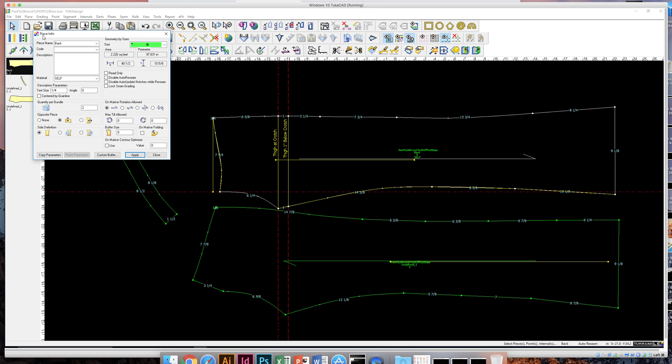Okay, I'm going to double click that. Oh, when I double clicked, it pulled up the whole pattern piece, not my line. So if that happens, maybe we zoom in and try to get closer.

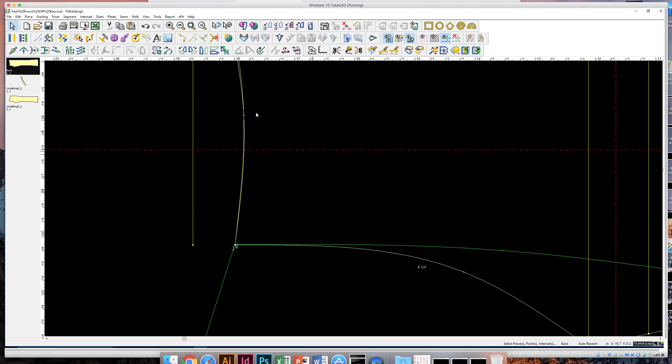Let's see if this will work. Okay, it's a little bit off here. I should actually move that anyway while I'm here. Oops, use my zoom tool. What we'll probably have to do is add a point on an internal line because I skipped that anchor point, and that's why it's off.

So I'm going to do that real quick, add a point right here. It's curve, say OK. And then now go ahead and move it with the move tool. Oh dear, I don't think it worked. There it goes, click and say OK. Great, now it's exactly on my piece.

But again, that doesn't solve my first problem. Oh, actually when I clicked it this time it did go to the internal line, so I lucked out. But if I was still having trouble not selecting my piece, what I do sometimes is move my contour line just for a second, just one point on it, so they're not completely overlapping. That makes it easier to grab it just to name it, and then I put the point back on top of the piece. Let me know if you guys are having that issue.

Okay, so I'm going to call this natural waist. I don't believe I have that measurement called out yet. I do want it for both pieces because I want it to wrap all the way around the body. So say OK.

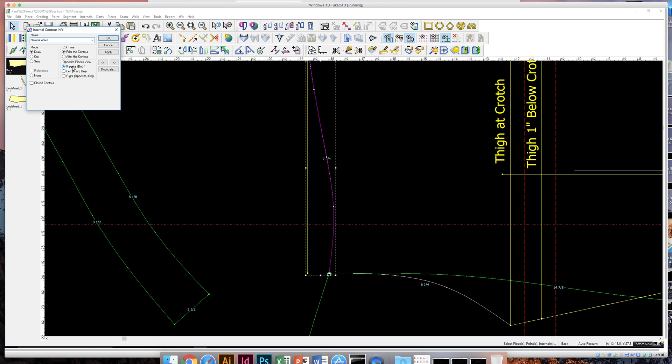Let's see if I can move this. Okay, so now I need to add to natural waist and include the back. Maybe I can zoom in a bit for the back. I will hit D for my draft tool, and I will click the first point.

Okay, yes. Hold shift and click that next point. Hold shift and click the next point. And then I believe that's a shift.

Oh, we might need to clean up this pattern piece a little bit. And then click the last one. That's not looking good, I'm going to say cancel. Let's try that again, I feel like we should probably get rid of one of these points. This pattern needs to be cleaned up a little bit. There we go, okay, let's try that again.

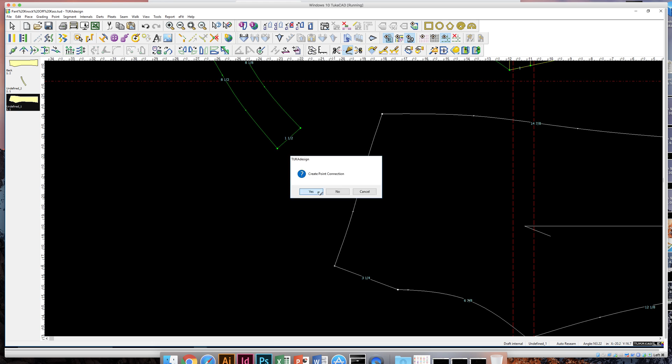So click the first point with our draft tool, hold shift and get the next one. Again, shift adds the curve. Shift and get the next point. Then I'm not going to hold shift for the last one because it's actually not a curve point. Click. Okay, yes, and then right click to finish.

Okay, so now I'm going to double click it. Shoot, when I double clicked it, it opened up the piece information, the whole pattern piece, not just the segment. But that's actually okay because this pattern piece right now is set to only cutting one per bundle, and we should actually cut out two, one for the left leg, one for the right leg.

So I guess in a way it's kind of helping us, and we need to give it a name. The other one was called back, let's call this guy front. And the material should be self fabric. Apply and close. Okay, let's see if we can have any more luck.

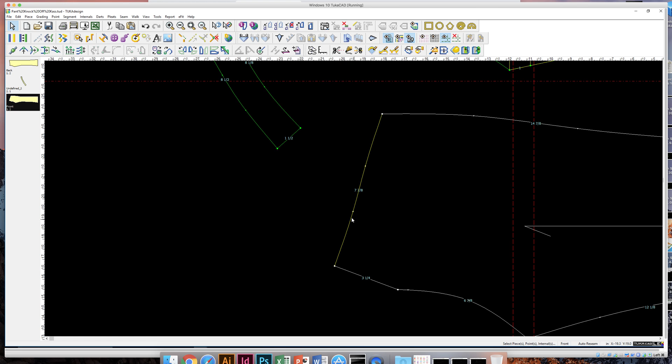Just double clicking just the segment line. Nope. Okay, so what I'm going to do is move one point just a little bit. And then now I can double click the segment. Let's hit line, oh geez, I'm going to do the line, not the point. There we go, internal contour info. A little tricky, but I got there.

So now this is also part of my natural waist, so I'm going to click natural waist. And I will say both pieces because there are two of them. Apply, OK. Now I'm going to get my move tool and move my pattern piece back onto that point, and say OK.

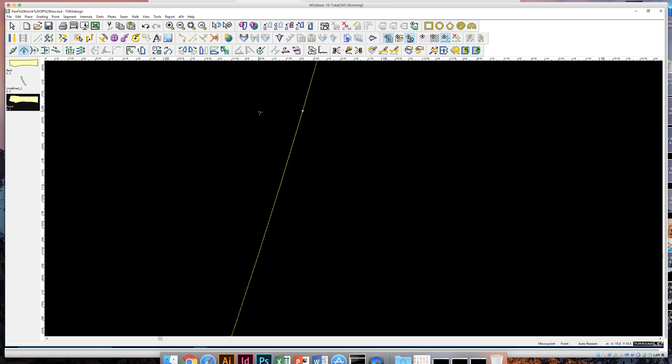Okay, I'm going to zoom out. So let's go ahead and check our report. Report measurements. So our across waist is just 15 inches and 3/8, but our natural waist is 31 inches and 3/8 because it's measuring the whole curve twice and the back as well. So you can see it's measuring the back piece and the front piece, and two of them.

Yeah, okay, great. So again, finish up all the points of measurements for this assignment and be sure to name it on your pattern. And again, let me know if you have more questions.